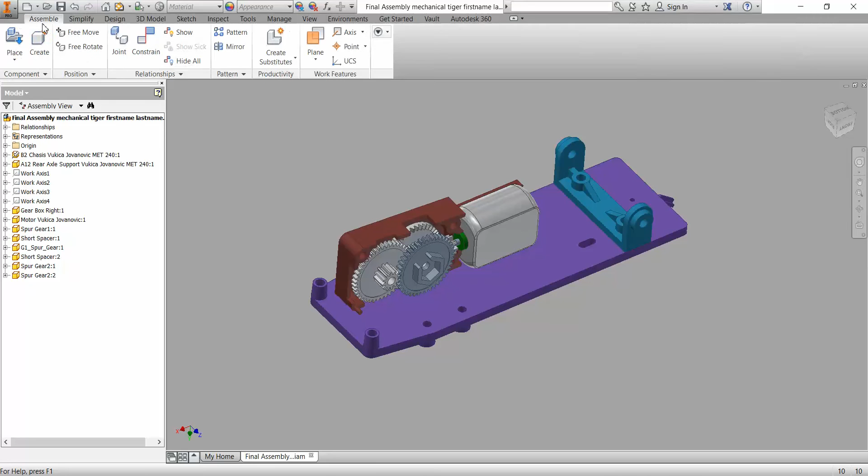So you'll go in place, and if you don't have dimensions, it's like diameter 6 inside, 3 by 5. It's only one extrude, so I'm adding the M1 spacer here, and then to assemble that, all we have to do is select the surfaces.

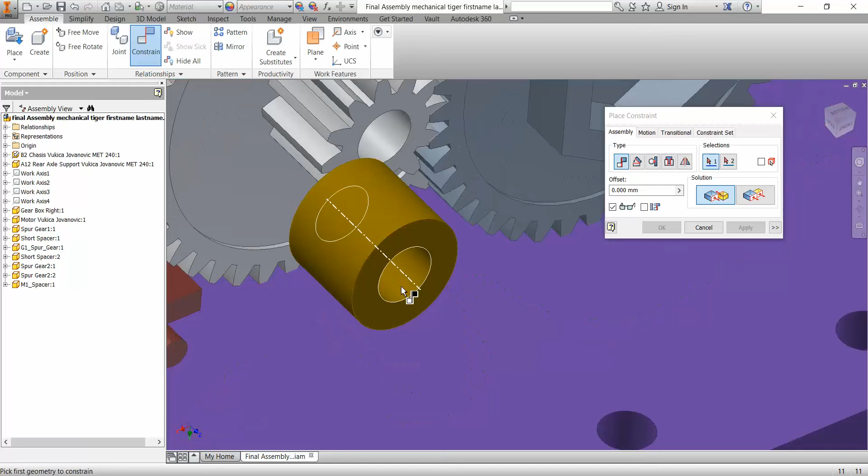Select this surface and this surface, apply, and then do the axis - one axis here, the other axis there.

And then on top of that, we will add the part which is called hex shaft.

So when I add the hex shaft, open, and for that part, we will need to add something inside, which is the axis in between two planes.

So I will turn on visibility for this plane, the XZ and XY, and then I will say I would like to create an axis which is the intersection of two planes.

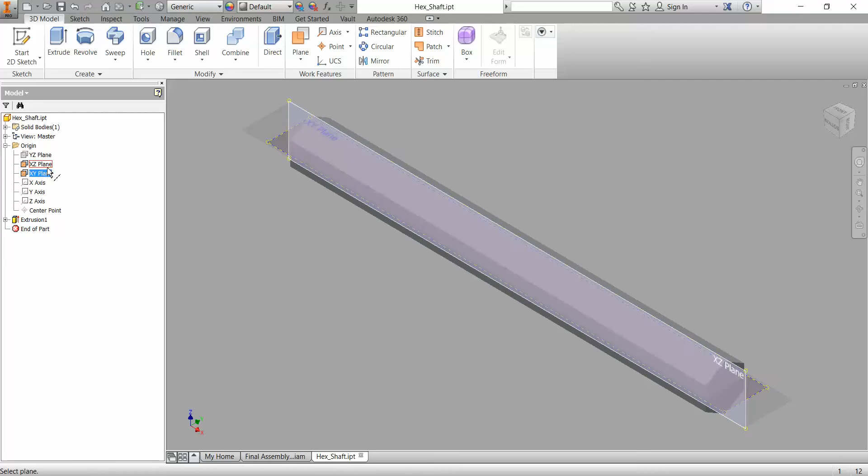Then I will select these two planes, and I'll get the axis I need to assemble this component. Then I can just hide the planes again, both of them.

Then I will change the color. Well, I don't have to change the color, I guess. Just say yes.

So I would then say I'm going to constrain this axis to this axis.

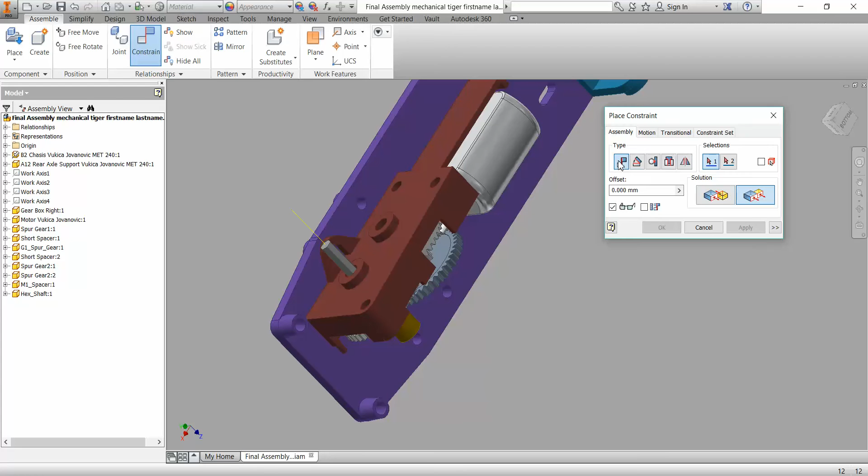And then another constraint I would need will be mate, flush, and I'll select this plane and this plane like this. So now you see how it is, and after I finish that, I don't really need to see that axis, so I can just hide it.

Right click, visibility. So now I will add another component, the hex shaft collar here.

Let's see, rotate it a little bit, and I have to figure out where exactly I need to put it. So let me see here.

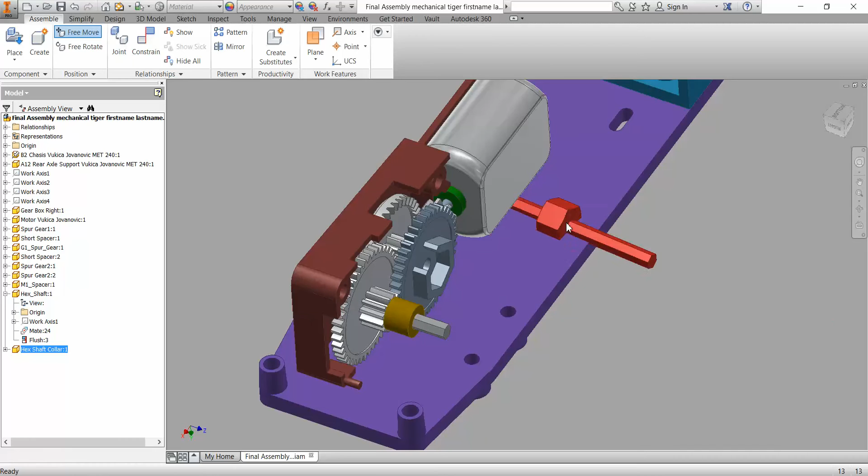And then a little bit up. From which side? Probably this one.

Okay, so I'll say constrain, and I'll add this plane inside of this one. Apply. Then also I need to add an axis for the hex shaft collar.

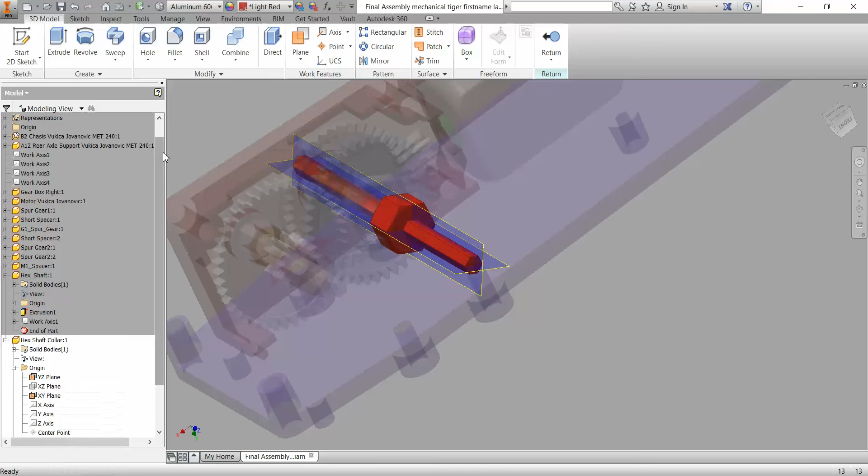So you can double click here, and basically you will see the component. And then again I will turn on two planes. I will say visible, no, this one, visible, and then I will say I need to create an axis.

Which is the intersection through these two visible planes. And then after I did it, escape, and I can just say visible and change visibility. So all I need is the axis, and here I would say return.

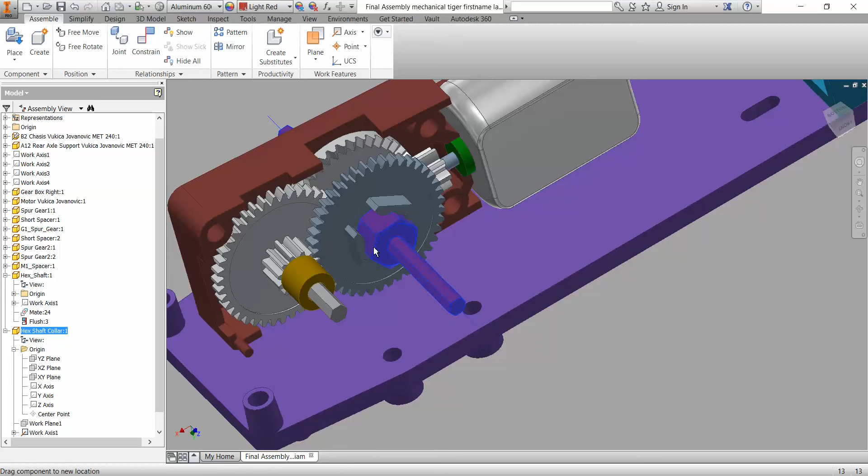So now I will constrain the axis with this one. Apply, and this would still move around, so I would just do the free move just so I can select it.

And the last constraint I need is this plane and this plane, and please check that the dimensions are correct. If you cannot do this, probably you have to go inspect and check the gap inside the gear and check what's going on in the collar.

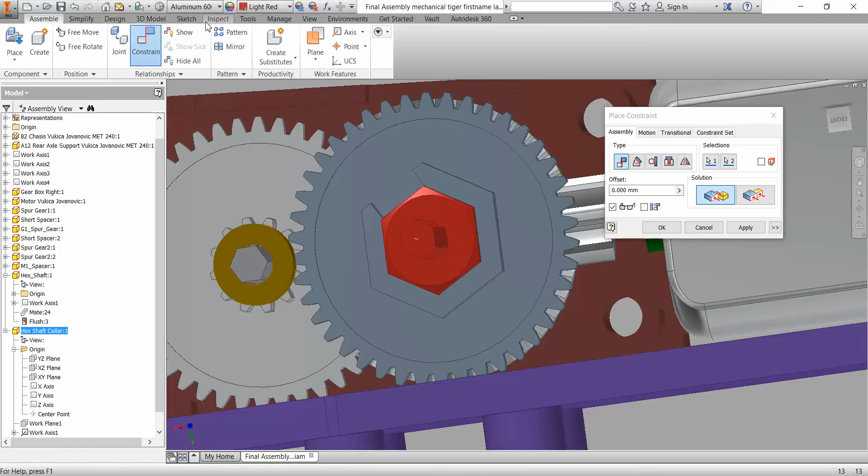Both of these values should be matching, and that value is, let me tell you in a second, from here to here, 7. So basically that should be 7.

Okay, so let me see, I somehow didn't accept my constraints, so I have this one and I have that one. So if I say regenerate, I will go back to what I need, and then I can hide my work axis.

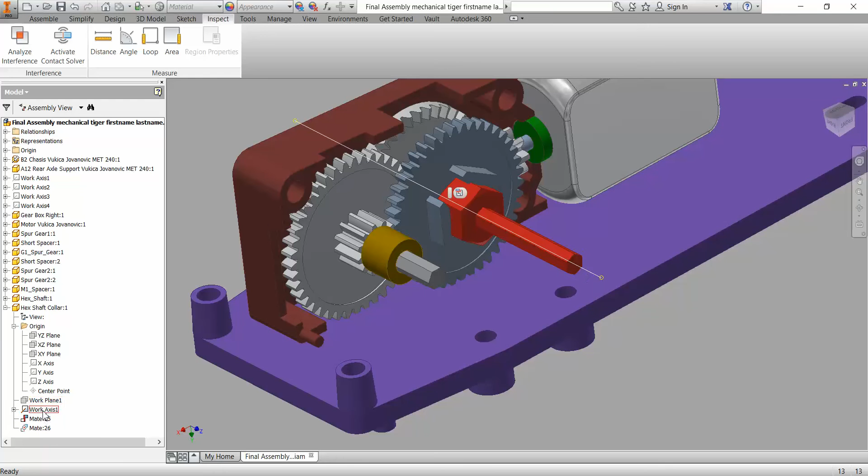Visibility. And now I will add another - so I have a gearbox right, and then I will add gearbox left.

And I'll put it here.

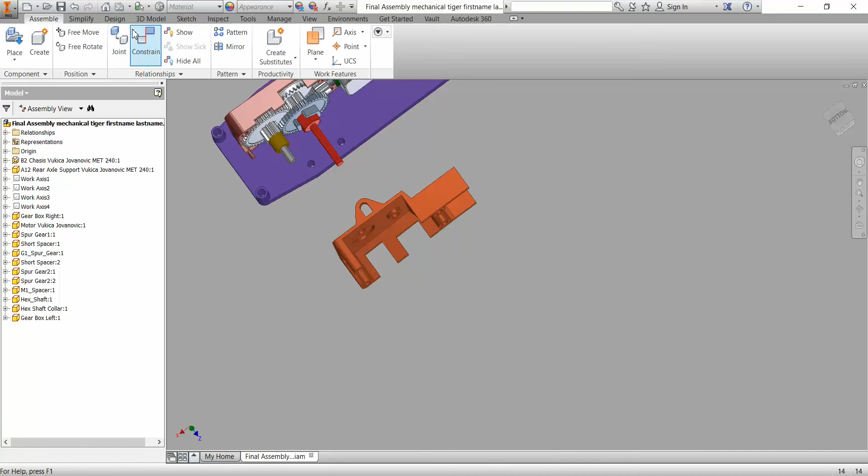So this has to go to that plane, apply, and then I will need to move it a little bit, but basically I will attach here.

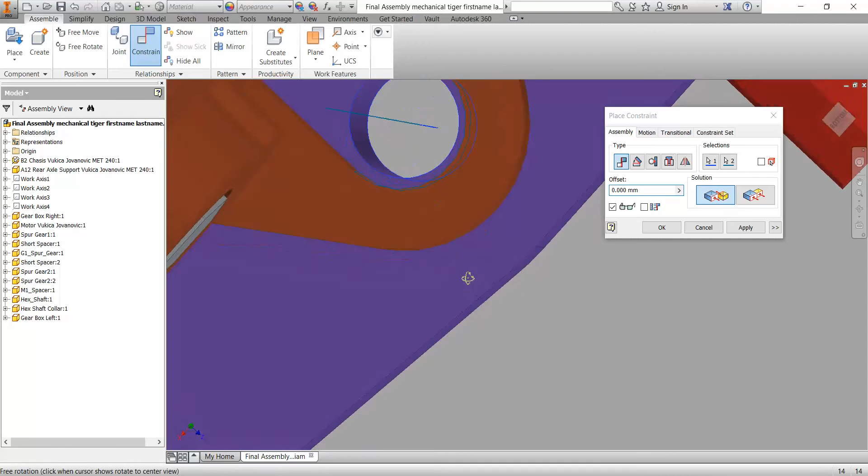You see that hole is for positioning - this one, you see, apply, and still it's not defined in this way, so I can say parallel.

So I will say angle, the one in the middle, and I will say, okay, you and you should be closed like that. So in that way I'm closing the gap, and if you see here it's a little bit overlapping.

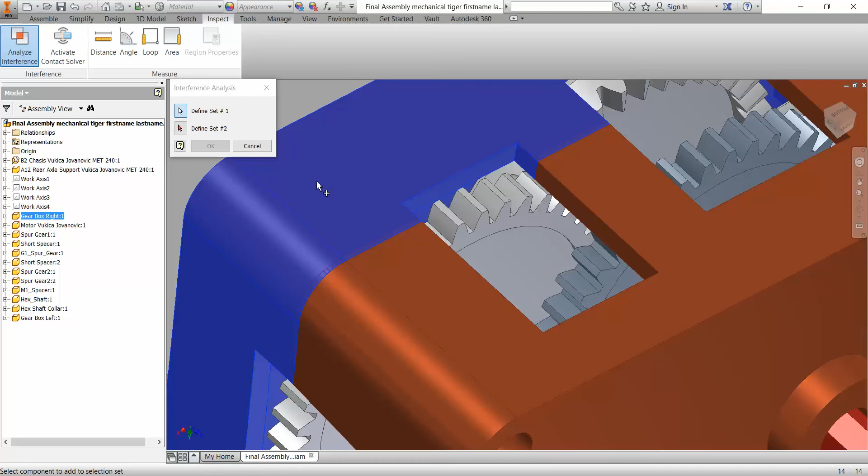So basically if you go to inspect and say analyze interference, define set 1, select right, define set 2, select left, and you will see that there's a little bit something there that doesn't fit.

So basically if I go to the gearbox right, and if I try to figure out what was the first extrusion, the added feature, how big was it?

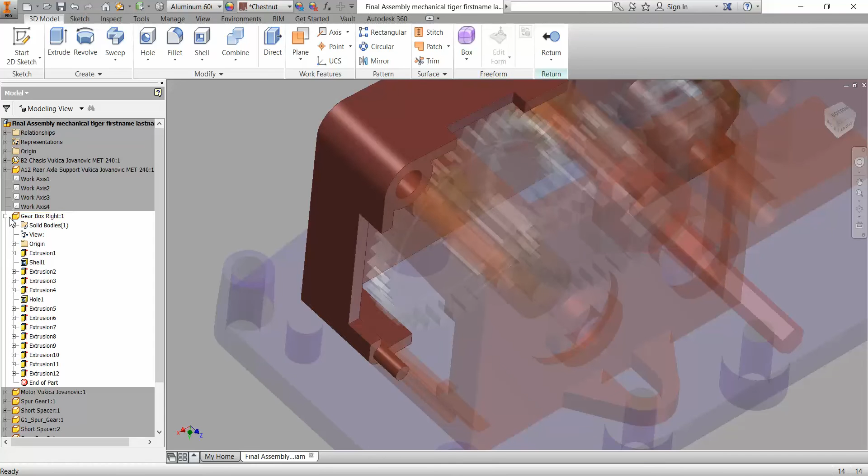9.2. And then if I go back to my return, then I go to the gearbox left, and I try to measure to see what's going on with the first extrusion here.

So the first one was 9.2, this one is 14, so together 14 and 9.2 should be 23.2.

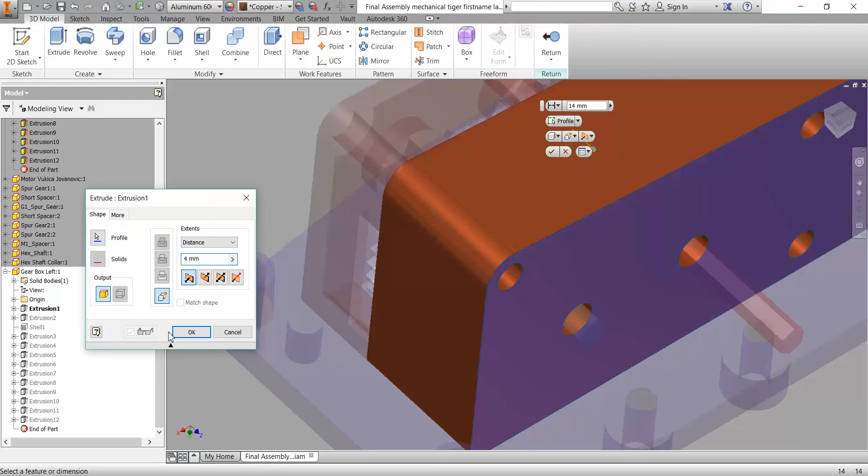So basically, if you remember, I need these two for the distance in between the holes. So I would say cancel, I was just looking at what it is.

And then in my B, in my chassis, so if I double click here, and if I try to find where these holes are, I think they were in the first,

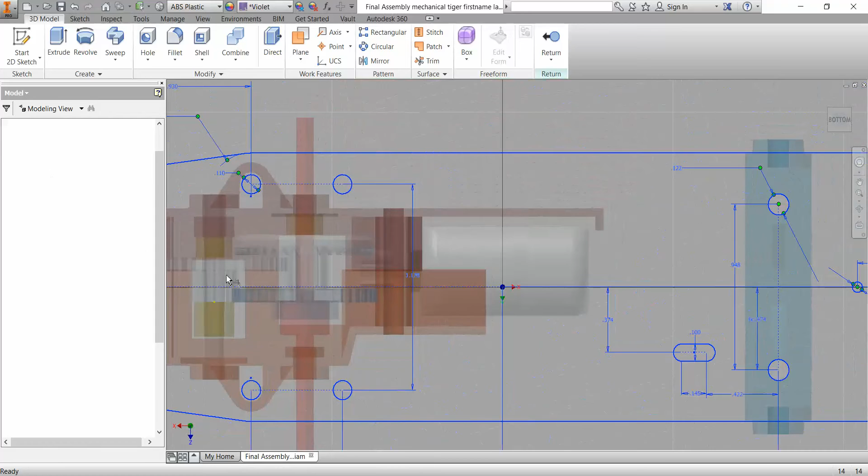the big sketch that we did. So basically this dimension here has to match whatever this dimension is, because that's where we're aligning these holes.

So if I add 14 millimeters plus 9.2, you see it will be a little bit different.

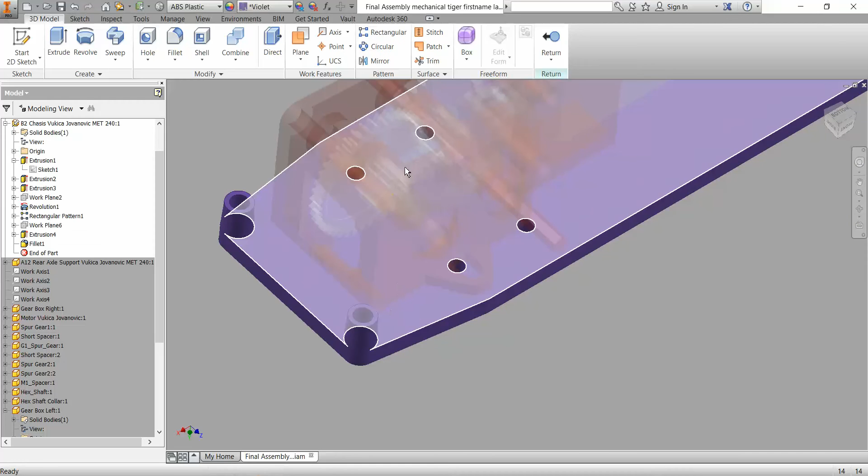Let's see what's - no, I think it will be even more overlapping. No, that's wrong. So let me do it one more time.

I think I didn't do it right. So my first one was 9.2,

and second one, 14.

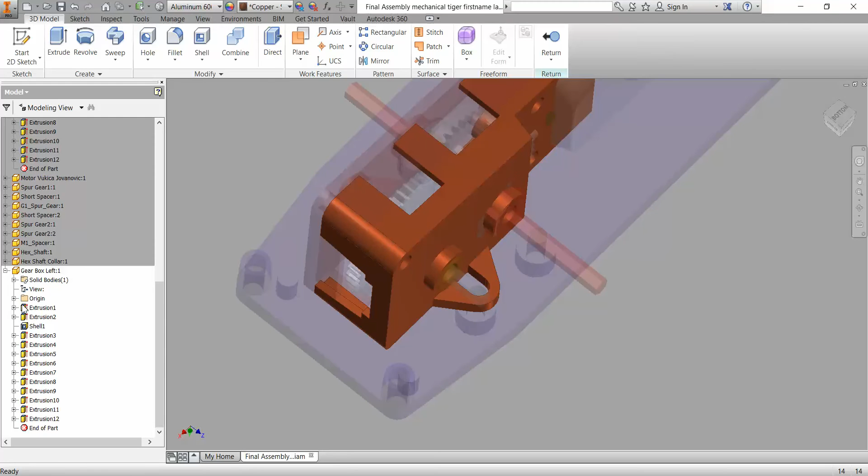So then when I add it on B2 chassis, the first extrude,

somehow I made it even smaller - 14 millimeters. Okay, let me try 23.2 millimeters, because it's in inches.

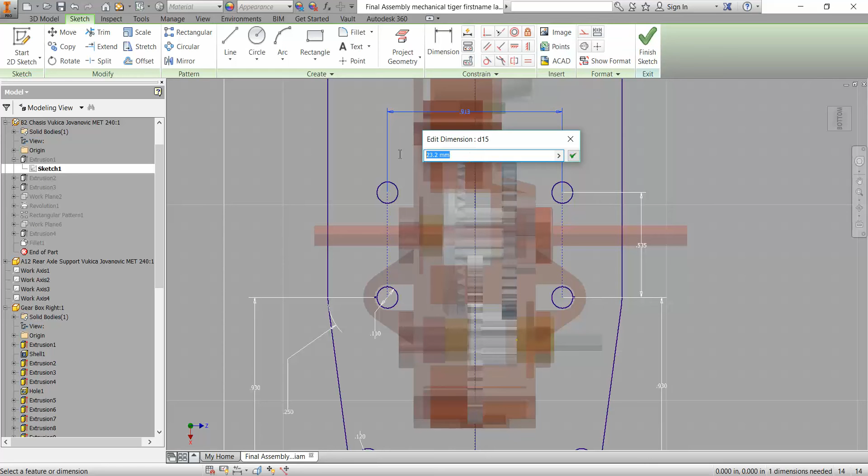Okay, I'll make it bigger, 28 millimeters. Still it's not good, I think I still have overlapping here. So what if I change it to 30?

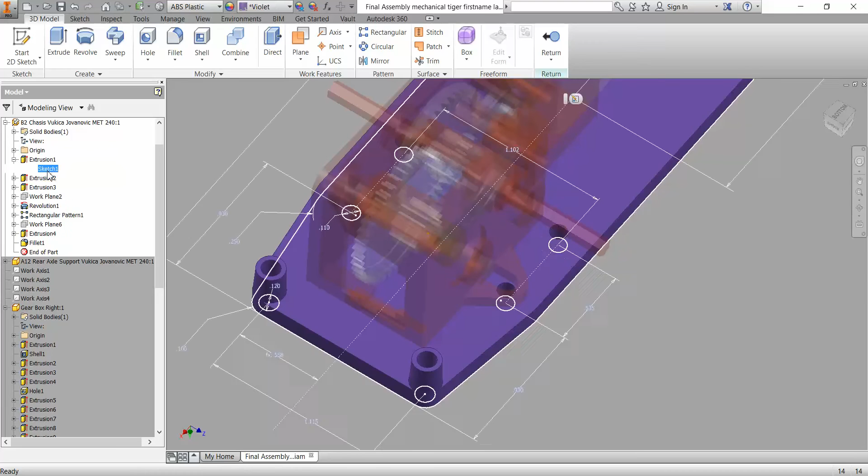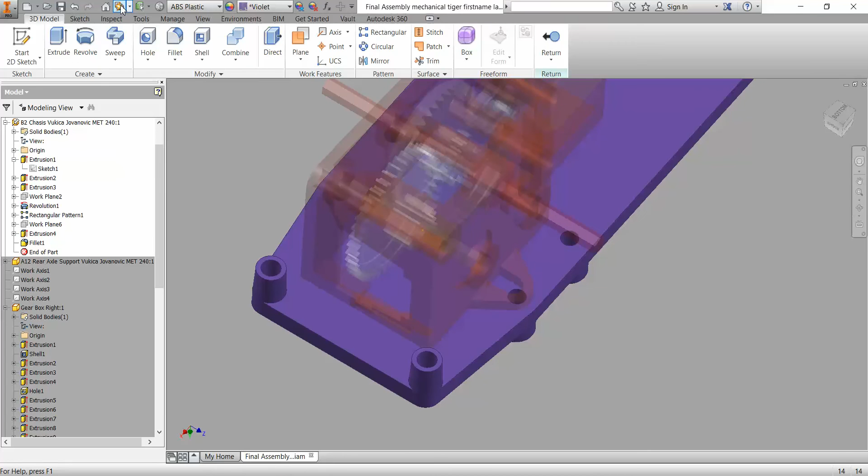Refresh. No, a little bit more. So I'll go back to sketch. Let's see if I put 32 millimeters. That, so now maybe I have a gap. Let's see, return. Yeah, I do have a gap. So I put 32, and let's see my distance.

32, so it should be 30.2. Okay, so 30.2.

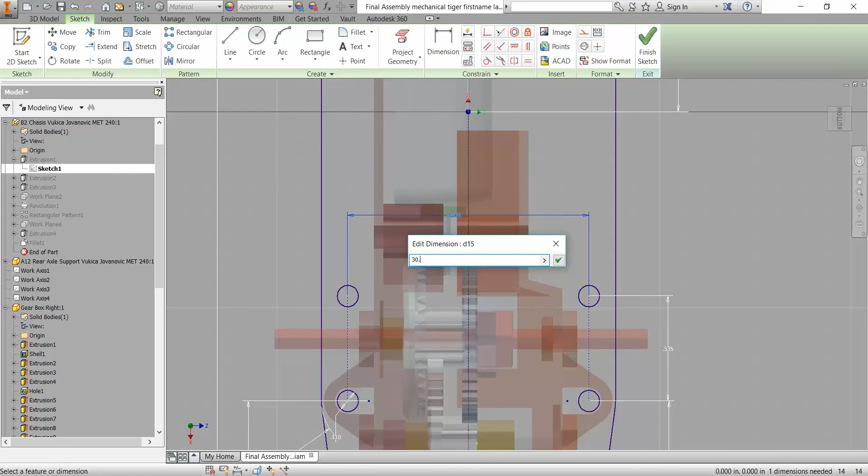And now it's good. Interference, set 1, set 2. Yeah, now it's interfering with this, but that's a different thing related to what's in the gears, I guess.

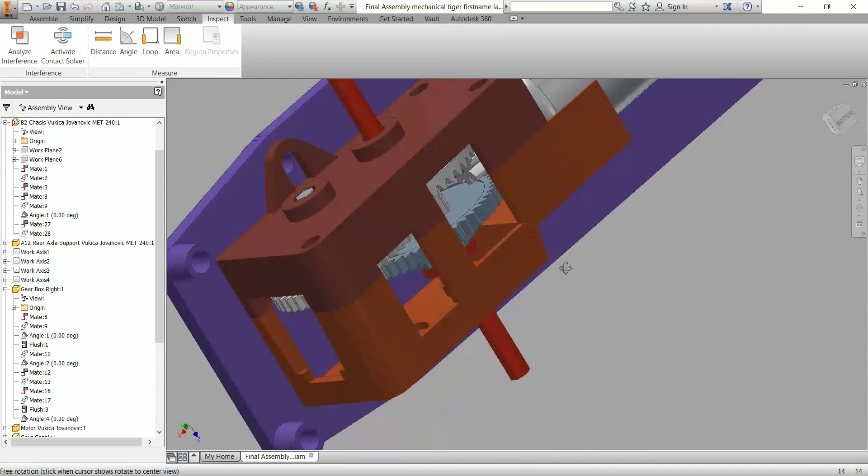Maybe some of these. Okay, so, oof, I forgot to add another color part, but I can do it if I just hide it. So I would do visibility, I would change visibility here. Oh no, it's fine, I did it. So I'll put it back.

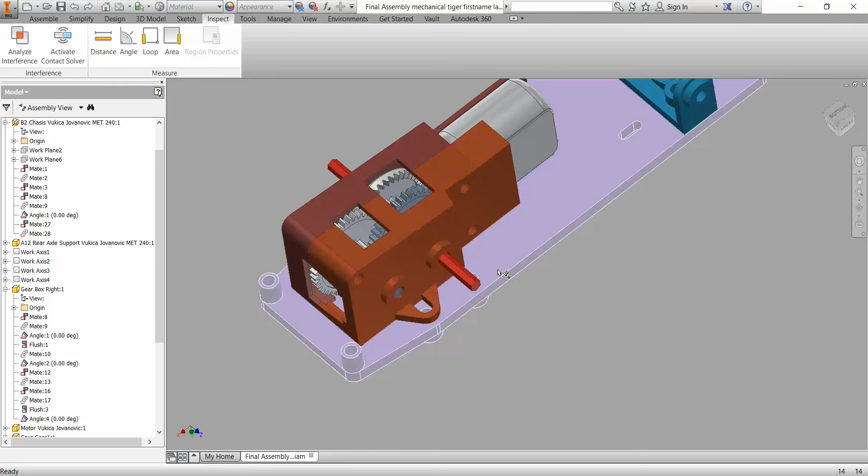Okay, so next step, I'm on page 1247, is to add the A9 crank right, basically from this side. So I will say assemble, place, A9 crank right... crank right, which I don't have. Great, crank right, here you are. Open.

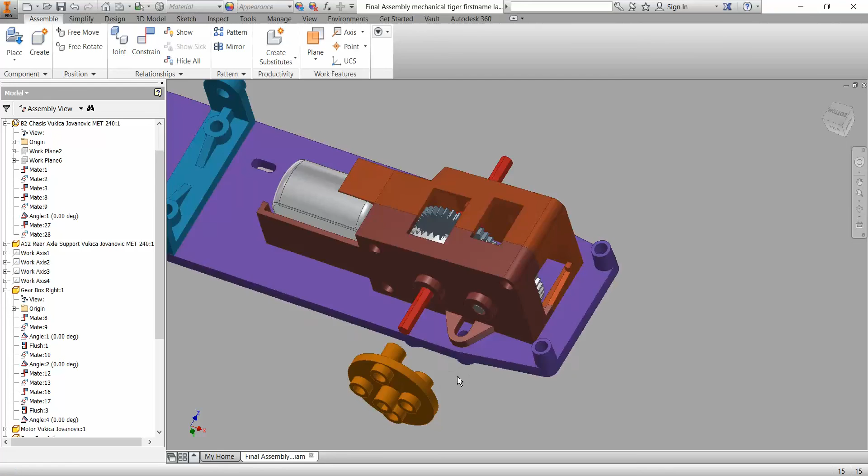So where are my numbers from the other side? So I will say free rotate. Numbers should be here, and the way it says here should be like this. Number 2 and 3, if you take a look at the picture at page 1247. Okay, so I'll do constraining in this way.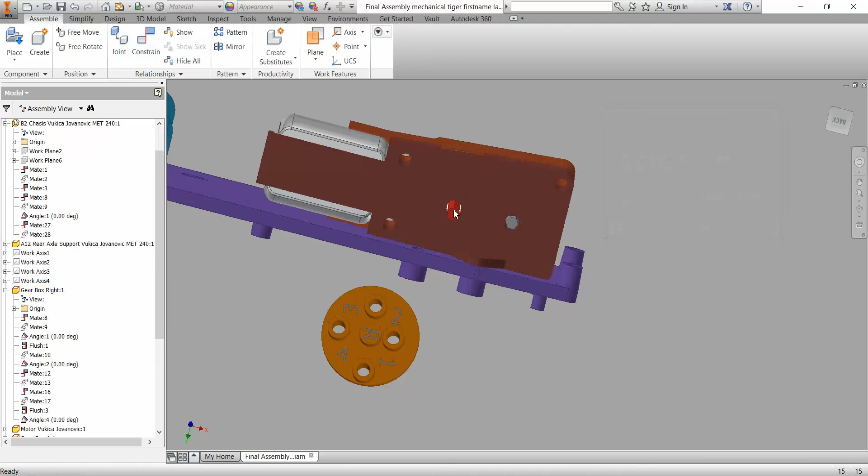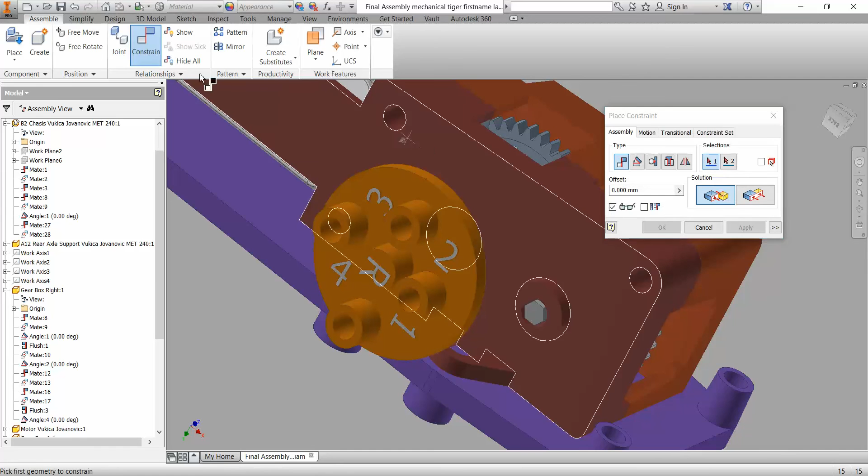So let me see, this I can still flip. So let me put it like this. So the one on top should go on the one on top here. That, apply. Then I will just free move it a little bit.

And then I want to make sure that, well, I have to put this one, and I can rotate inside of this, just to be able to select this one and this one. Apply.

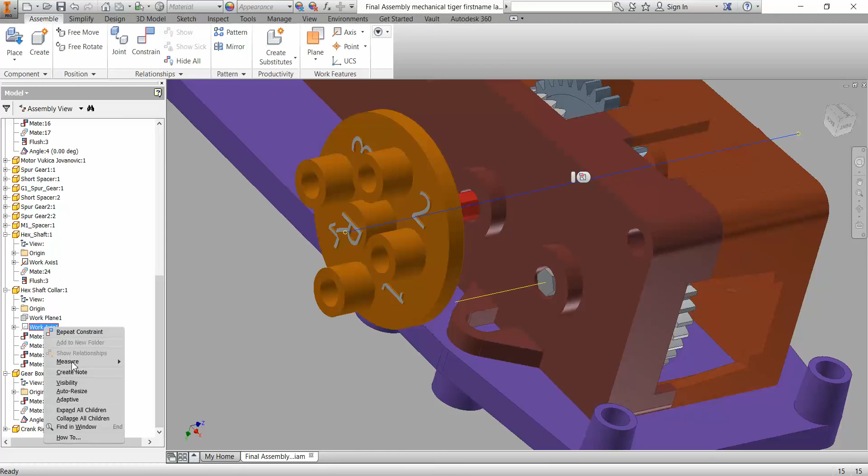And I probably have to align axis. So for my other hex shaft, I have that axis which I need again. So I will say that it's visible. Oops, no, the other one. The hex shaft collar, I also have an axis there. Visible. So I'll do free move, and I'll say I would like to align this axis, and I can select this cylinder here because they're okay. And let's see what's going on.

So you see, now they're going together. So I will leave these, maybe I will need them for the other one.

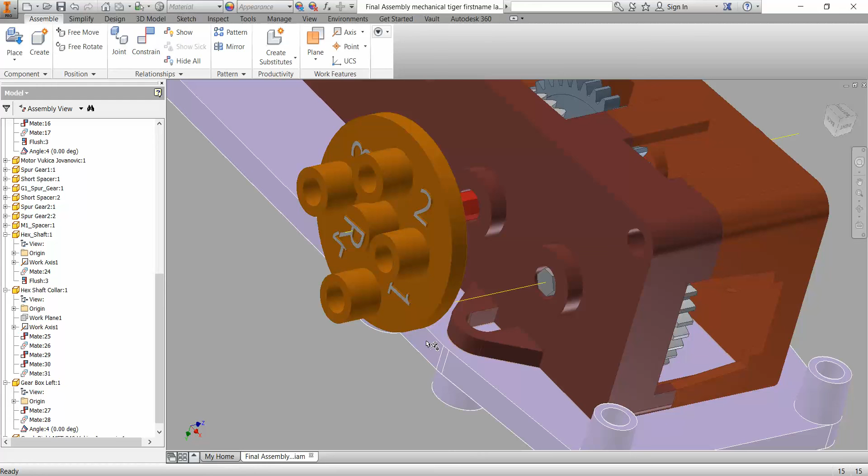So basically I put the crank right, and now I will need to put the crank left. So I say place, crank left here. Oh, something is wrong with this part, let me get another one. Okay, that's the one, left.

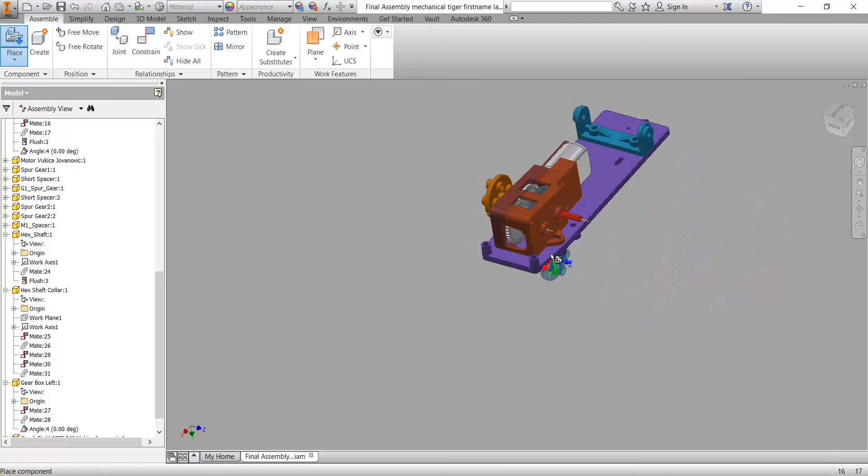And now the same thing. So I have to figure out how, okay, it's exactly how is this. L is upside down. And here I will align this top with whatever comes here on that side. Apply.

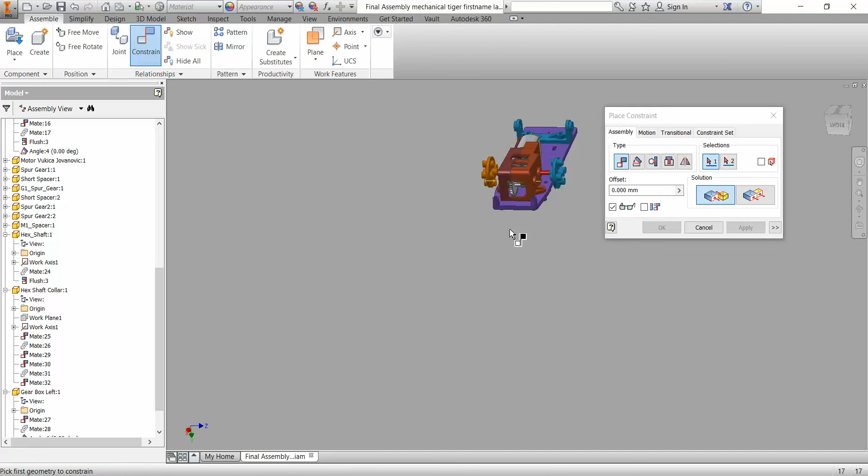Then I would like to move it again, maybe rotated a little bit, just so I can select these two surfaces, this one and this one here. Apply, and then the last thing I have to do here is to align axis.

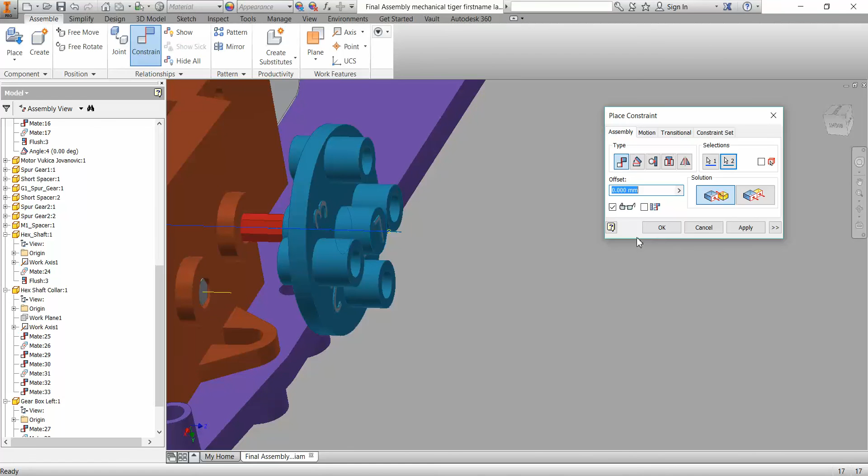So I will say that this axis and this axis are together. So now if I move this around, you see it goes together. That's very important for our final assembly.

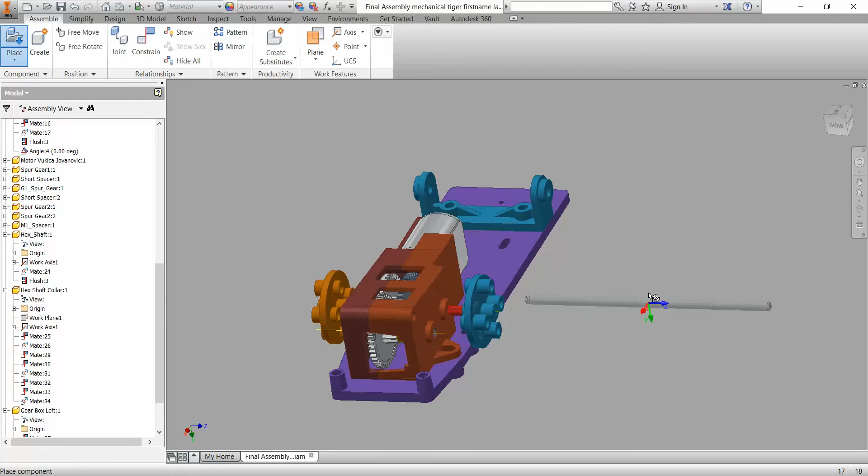So I'm at page 1249, and now it's saying assemble the rear shaft and legs. So shaft 3 by 80, I'm going to place, let's see if I have that shaft 3 by 80, here you are, and it's going to go here. Okay, apply, and then it's 80 long.

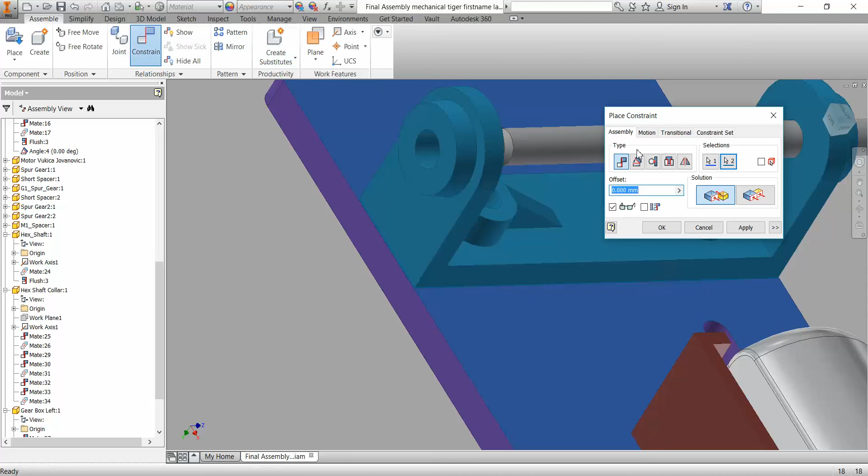And what do I have here? I have here from this plane to this, oops, again, oh, I have to do inspect. So I do inspect distance from this plane to this plane. What do I have? I will just copy that value, and then I will do from here to here.

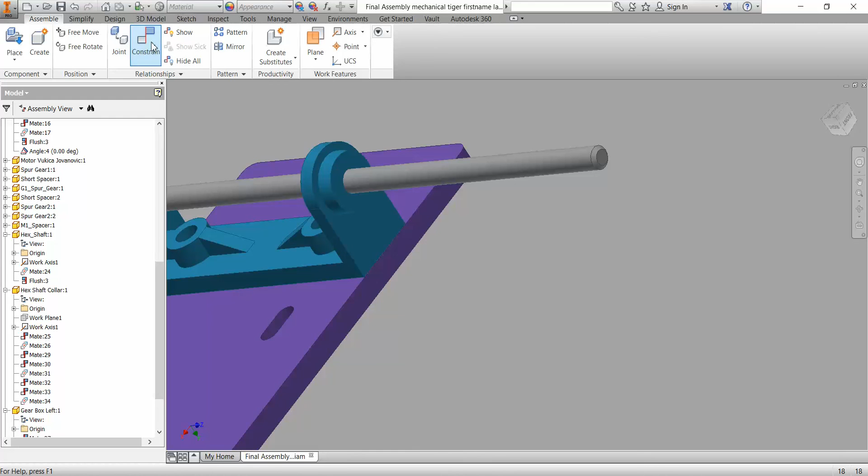Okay, 44. So I will say if I do constrain and change this to flush, so I say from here to here, let's see if I can make an equation. Then I'm going to do 80 millimeters minus whatever that is divided by 2. 80 is my shaft, that distance that I measured, divided by 2.

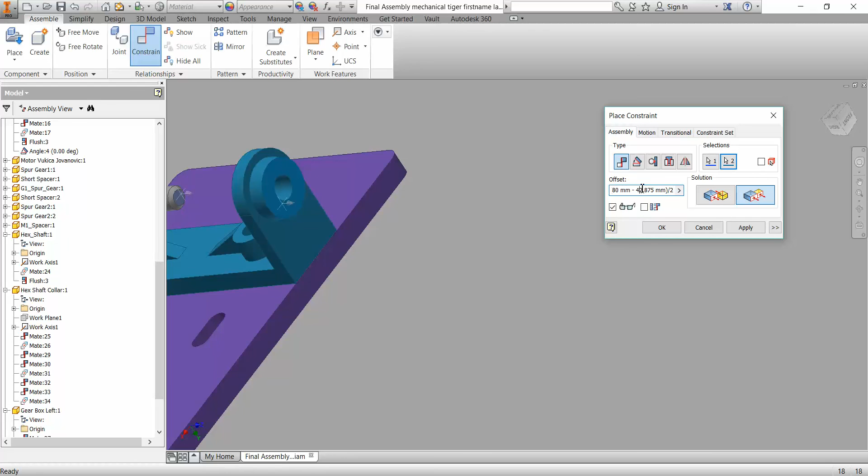But it seems like here it goes in another direction, so I will add minus. Yeah, so you see what I did. Basically 80 is the total length here, and I minus that divided by 2. That's what I get. And then based on where it's going, you can add minus, so it goes in the direction you want. So currently I have something like this.

And I'm at page 1251. Now I will have to add the A3 spacer, which I didn't save. So A3 spacer is something, maybe I can show you how you can create it. I think it was in one of our homeworks where you have multiple small parts. I'm trying to find it.

So that spacer should be added next. So basically, then I will stop the video, and then once I found my spacer, I will continue in the following, or maybe I need to create it if I didn't save it to my folder.